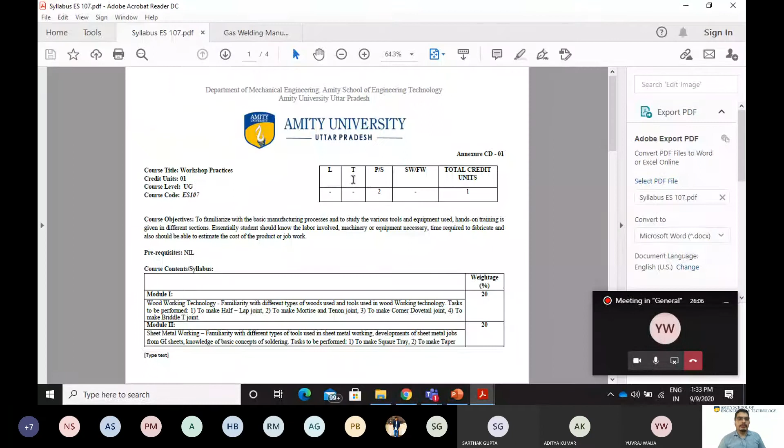Now we are going to start our syllabus. I'm going to discuss with you the first thing about your syllabus. Yes students, are you able to see the screen? Yes sir, yes sir, yes sir. Okay great.

Now listen, beta, this course is basically workshop practices. Firstly, let me give you the theme of today's lecture. First we will discuss our syllabus, then the whole practicals or shops which we are going to do in this course, then after that we will start with welding, gas welding and arc welding. These are the steps which we are going to follow in this course.

The course title for this course is workshop practices. Students, if you have any doubt at any time, just say excuse me sir, and I will try to answer your question. You can ask anytime. If you are facing a small problem, just tell me sir, we are not able to understand, kindly repeat it.

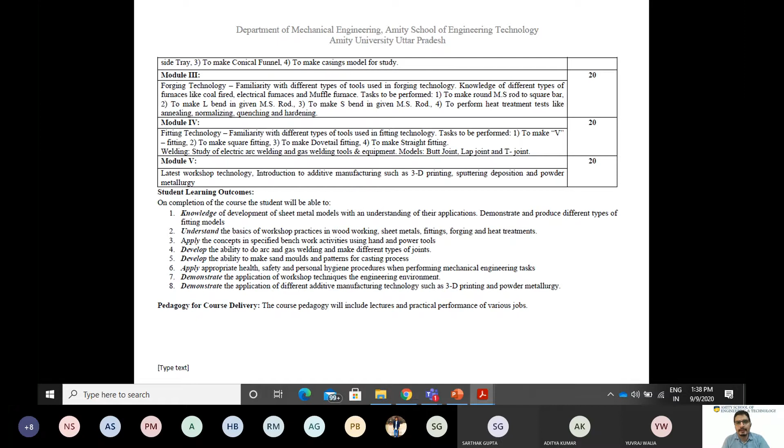These are the SLOs of this course, which are important for you. These are the experiments we need to complete - 11 or 10 experiments we will try to complete this semester. I will explain after 2 or 3 minutes more what these experiments mean and how we are going to do them.

The most important thing for all of you is this assessment - how we will assess you for this course. The internal assessment is 40 marks, and the end-term examination is 60 marks. Out of the 40 marks, 5 marks is for attendance. If you get 75% attendance, then only you are eligible for the final exam, and at that point you get 0 marks.

Out of these 5 attendance marks, if you get 80% attendance, then 1 mark. Accordingly it will increase at 85, 90, 95, and 95 to 100.

This PR is your performance, how you are going to perform the experiment. This is your lab record. What do you mean by lab record? If I'm just taking an example of today only, I will complete one experiment, that is the welding shop, gas welding and arc welding. Today we will try to complete it.

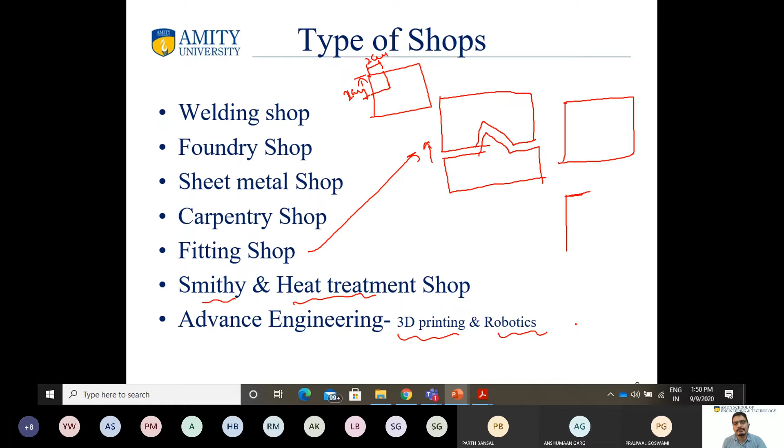Then after that, I will explain what is the smithy and heat treatment shop. And the last one is we will do 3D printing and robotics, how the robot is working. These are mainly the 7 shops which are in our syllabus.

The first one is welding shop, which we are going to do today. The second one is foundry shop. The third one is sheet metal shop. Fourth one is carpentry shop. Fifth one fitting, sixth one smithy and heat treatment, and the last one is for advanced engineering.

Right, beta? Prajwal, roll number 30. Yes, sir. Are you able to understand what we are going to do in this lab, beta? Ji sir, yes sir. Okay, great.

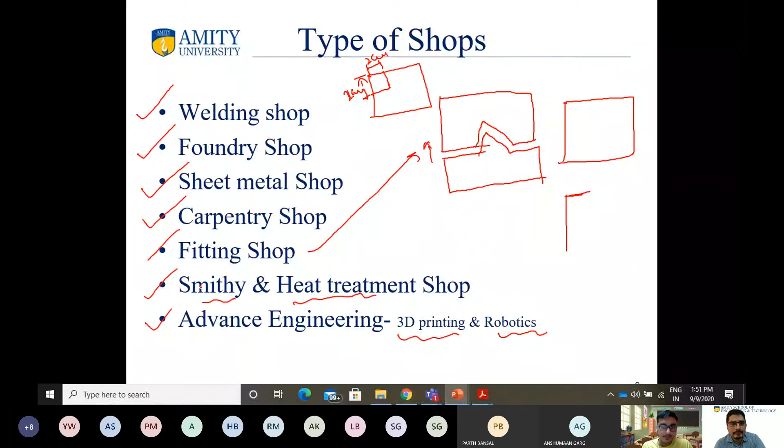Now, I am just giving you a small video about our workshop. You can see here.

This is machine shop. Various lathe machines, milling machines, drilling machines, and cutters are there. In this table, which you are able to see right now, you will do the sheet metal working. Sheet metal shop will be done on this table only.

Just one second, what happened? Are you able to see the video or not? Yes sir, we are able to. Okay, great. Okay, I will wait here.

This table which is in front of you is the carpentry shop. We will do the carpentry work here, and make the wooden joints here on this table. And after that, this is your... just one second.

This is your fitting shop. The fitting shop which I described to you about, we will make the joint, V joint, right? V joint we will make here, and square piece we will cut here. You are able to see the red color device, known as the bench vise, in which you will fix your material. These are the bench vises.

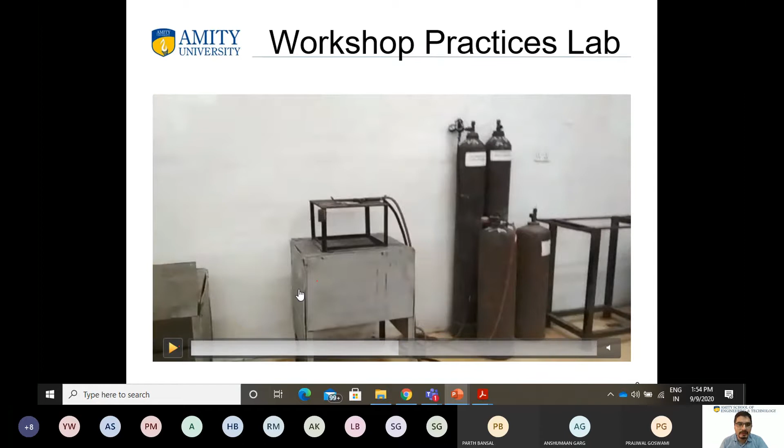I will explain. Basically you have to understand where the area is and how you are going to perform, so that's why I'm showing you this video. This is the gas welding area.

Are you able to see the sand? This is sand. Yes sir. In this sand we will do the casting shop, foundry shop - basically the single piece pattern and double piece pattern we will do in this area.

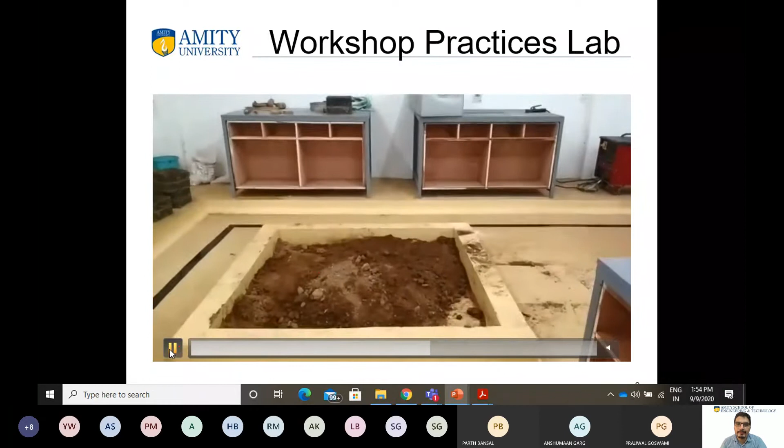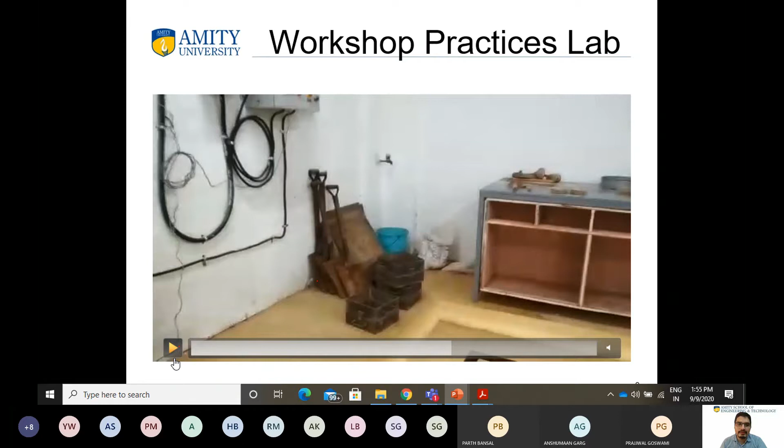Are you able to see the boxes in which my cursor is moving? These are the boxes in which you will make the mold - these are the cope and drag. I will explain you further. These are the tools which you are going to use during the casting process, during the foundry process. These are the patterns - single piece pattern and double piece pattern.

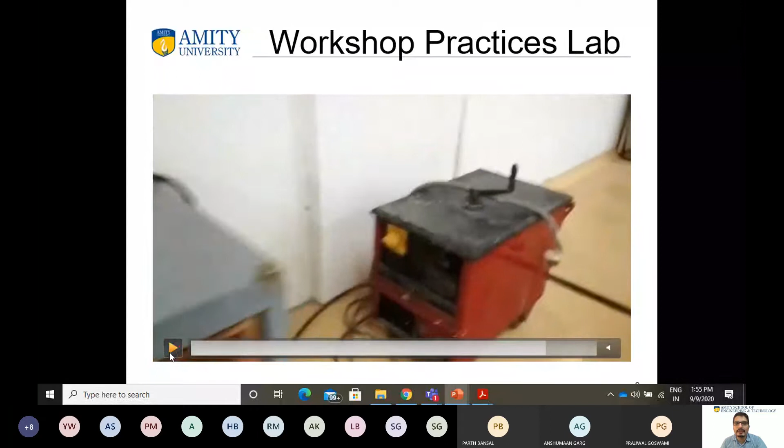Now this area is for the arc welding. This is a transformer. With the help of this you will do the arc welding.

This is a complete workshop of your central workshop, in which we will do the casting shop, gas welding, carpentry, fitting, and sheet metal work. I think now you are able to see where you are going to work, after lockdown. That is the complete picture about your workshop in which we have to do the work.

Now, these are the experiments which we are going to perform during this session. The first experiment is to make a butt, lap and T-joint. I will tell you the difference between these three joints with the help of gas and electric arc welding. Our today's task is to complete the first experiment.

Then after that, the second shop is to make green sand mold using single and double piece patterns. Third is to make a tray, cylinder, hopper and funnel of zinc coated iron sheet. Next is about your carpentry shop, then your fitting shop, then your blacksmithy operations. Next ones are basically study experiments - the last four are the study experiments.

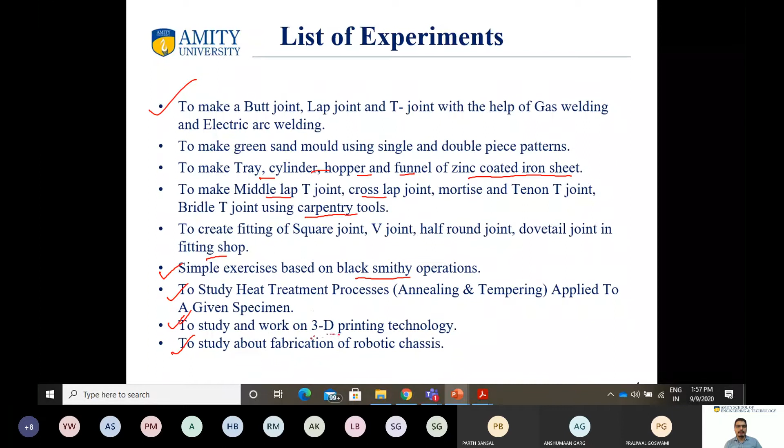And these are the practical experiments which we have to perform. When we meet after lockdown, we will perform these 6 experiments, and these are only the study experiments - to study and work on 3D printing technology, and to study about fabrication of robotics chassis. These are the 9 experiments which we have to perform. Okay students, any doubt?

Any doubt till now? I think now you are able to understand what we are going to do and where, what are the shops, what is the aim of this subject. And one thing that is important, and you have not asked me, the query is basically you have to ask from me like, sir, we are computer science students, why there is a need of all these things? You have to do the work on the computer only, you have to do the programming. Why is there a need of all these things? Why are we studying this course? That question must come from your side. Are you not curious about this question?

Yes, sir, but you have not asked. Then I don't think I need to give the answer of this question. Sir, I was thinking that you're going to explain it in the end. If you didn't, then I would have asked in the end.

Okay beta, when you are going to do computer science engineering, it is not just programming. When you think about programming, you have to think about the basic ideas also. Like I am guiding one student of your IT, BTech IT fourth year, who is doing his major project basically on lift pulley. He is trying to make the lift pulley and do the programming for it, how they can reduce congestion or mishappening in the lift.

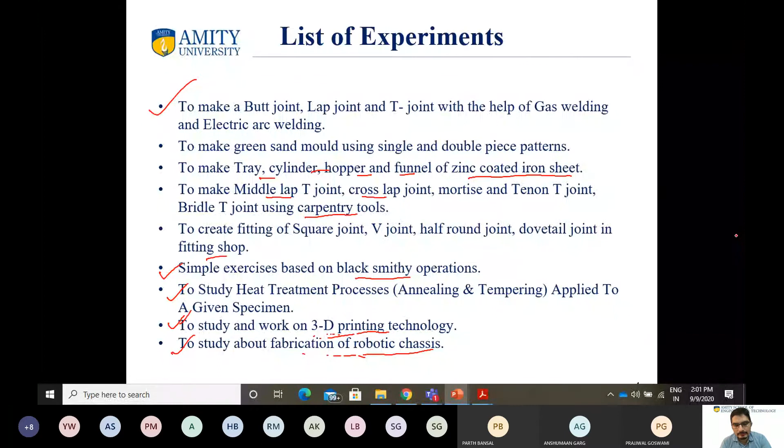Any doubt? Can I proceed for the first experiment now? Yes sir. Shantanu Raj, 331. Yes sir, it is clear beta? Yes sir. Okay, now today we are going to perform the first experiment, which is welding.

In welding, we will try to understand that there are two types of welding: gas welding and electric arc welding. Now here, the first term is welding. You must firstly know the meaning of welding. What do you mean by welding?

Can anyone give me the answer of welding? One by one, when you give the answer, firstly give me your roll number, then after that give the answer. Roll number? 351, Parth. Please tell me beta. So welding means joining two metals so that they are combined into one single piece of whatever the metal is, so that their strength is very strong, they are very difficult to separate. Okay, good try beta.

Any other student who wants to give me the answer of welding? What do you mean by welding? Yes, tell me beta. Sir, my roll number is 20346. Only give me the last digit beta. 346, Rakshit. Yes Rakshit beta. Sir, it is the process of joining by heating a third element in between the two, and as soon as the third metal comes back to normal solid state, by that time those two are already connected with each other. Yes, good try.

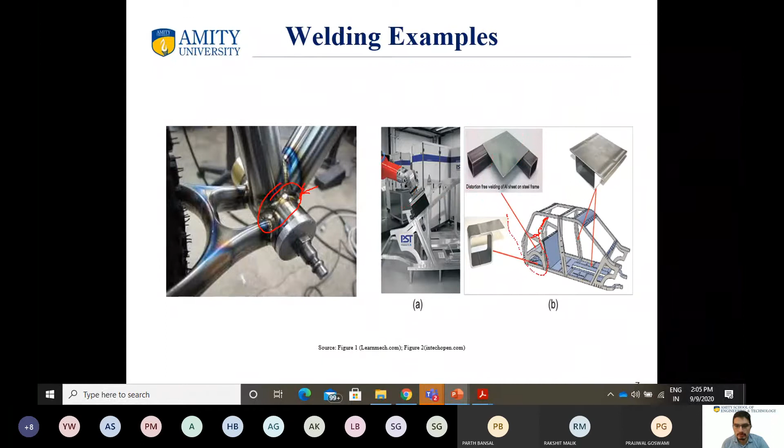Any doubt? Student, any doubt? You are asking anything? You can see here.

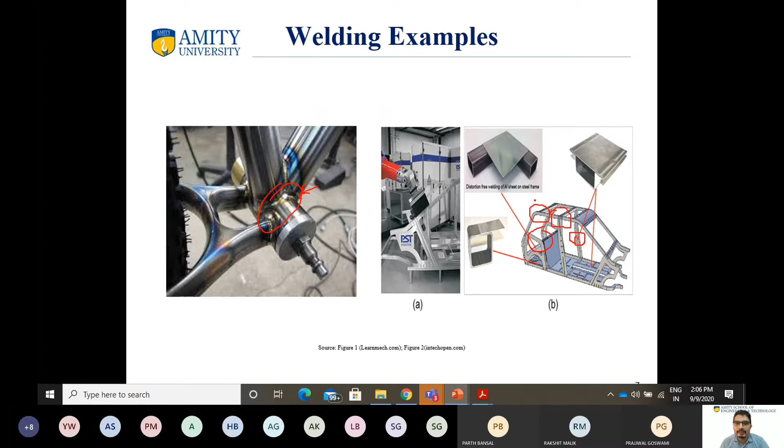Every part of your automobile engineering is joined by welding only. This can be arc welding or this can be gas welding also. I will tell you how it is decided, how we are deciding what type of welding is required.

The first thing we need to understand is, what do you mean by welding? Welding is the process of joining two metal pieces by application of heat, with or without pressure. This is the exact definition of welding: it is the process of joining two metal pieces by application of heat with or without pressure.

Now, the second one is gas welding. Before coming to gas welding, I want to come back. There are two types of welding. Now please try to understand what I want to convey. The first one is what is gas welding and what is arc welding. First, we need to understand what do you mean by welding: when you are going to join two metals with the help of heat, with or without applying pressure.

Now, the heat part, how can you generate it? You can generate heat by two methods in our workshop: with the help of electricity, or with the help of the reaction of gases. When you generate heat with the help of electricity, that is known as arc welding. Simple thing: if you are generating heat with the help of electricity, that type of welding is known as arc welding. If you are generating heat with the help of the reaction of two gases, then that type of welding is known as gas welding.

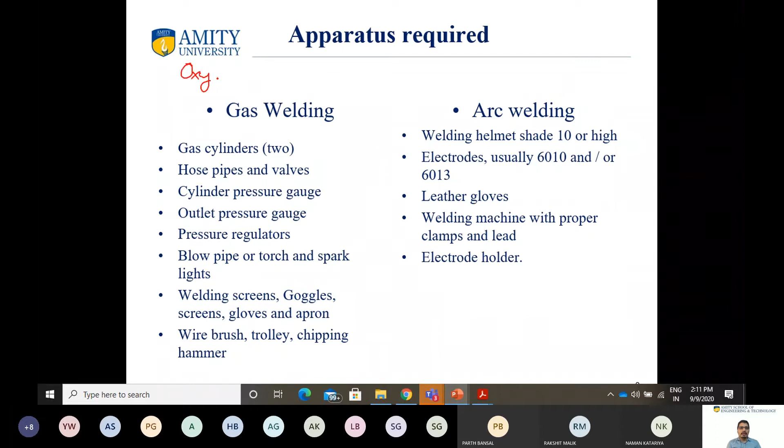Now, when I am talking about oxyacetylene gas welding, what is the formula for oxygen? That is O2. Can anyone tell me the formula for acetylene? C2H2.

When you are reacting these two gases, then what will come? The value coming here will be CO2 plus H2O plus heat. You can balance this reaction by yourself, but the external components will be carbon dioxide plus water plus heat. You are using this heat for doing the gas welding. This heat is in the form of a flame.

Now, this carbon dioxide will go into the air, and this H2O will evaporate with the help of this heat. Okay, students? Any doubt?

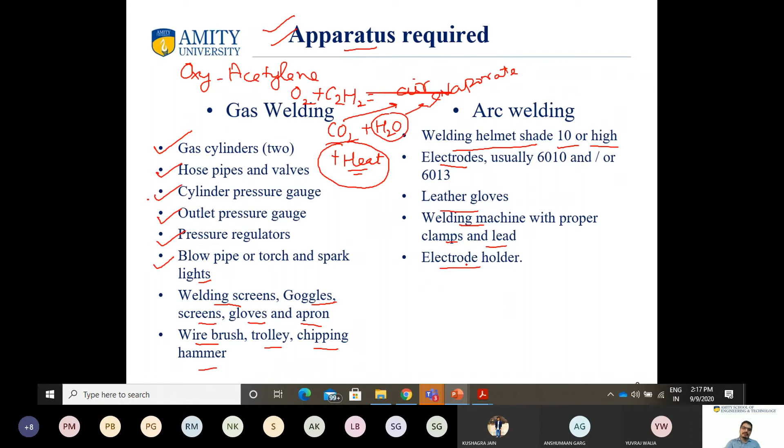In arc welding, we mainly use AC supply and electrodes. In gas welding we use oxygen gas, acetylene, filler metal, rod or wire, or fluxes. This is the answer to the question one student asked me about what we do for gas welding.

In arc welding, we are using electrodes. In gas welding, we are using filler metal, rod or wire, or fluxes. I will explain this further in the next PPTs also.

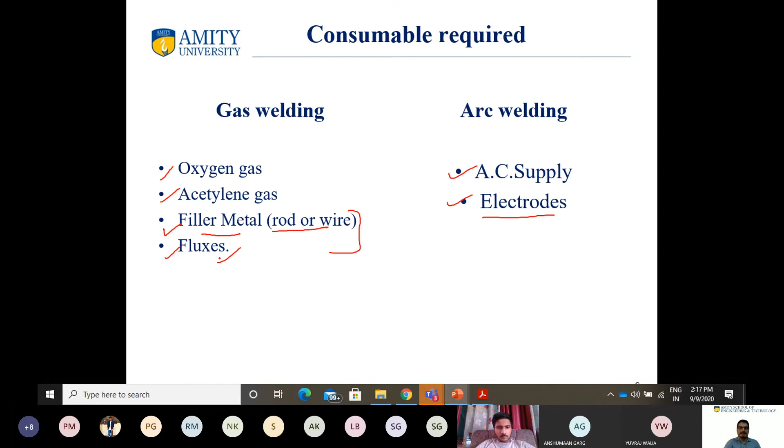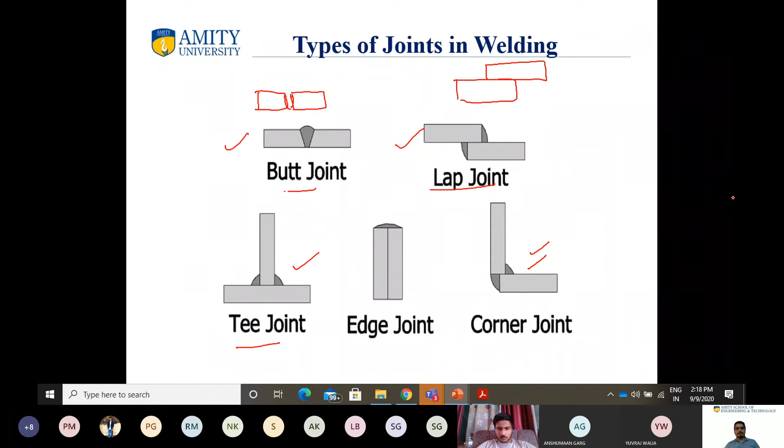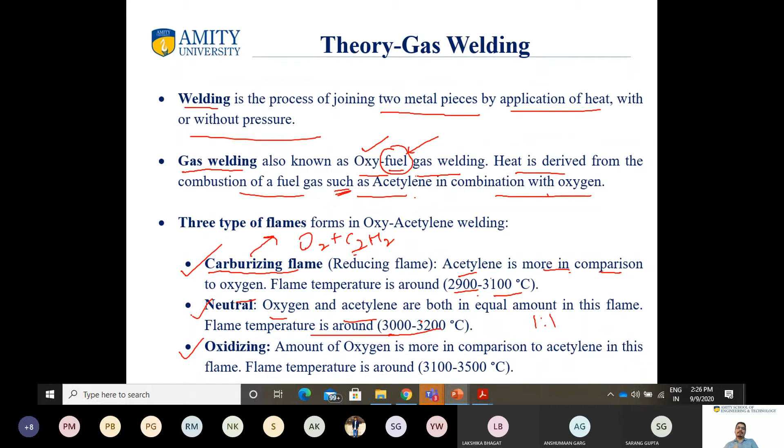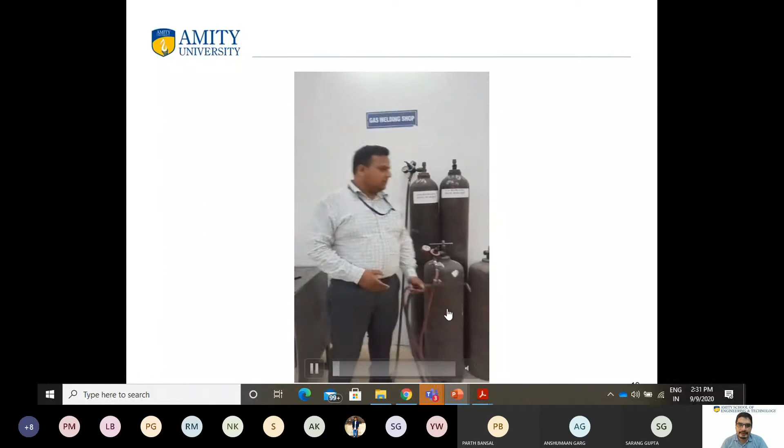Now I am going to show you a video. This is the welding shop. Just see it, if you have any doubt then I will explain again. This one is the oxygen cylinder and acetylene cylinder.

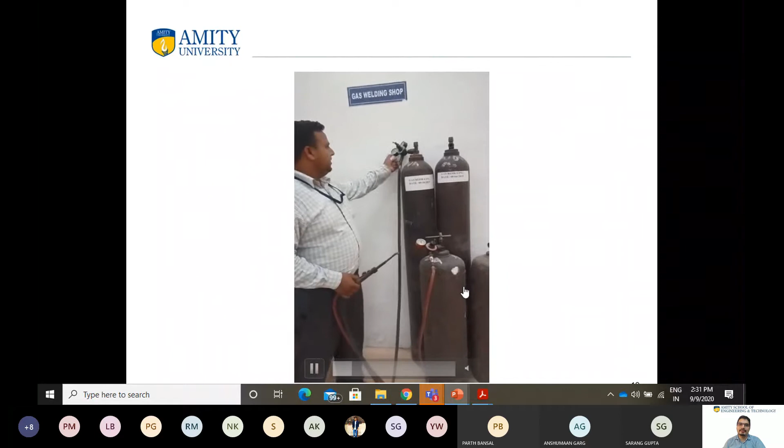From the black hose pipe, your oxygen will come, and from the red hose pipe, your acetylene will come. These are the three gauges. Are you able to see my cursor? Yes sir. In this area, the gases will react.

This is a bed sheet, meaning the bed at which you will do the welding. I will show you the bed again, wait, in the next video.

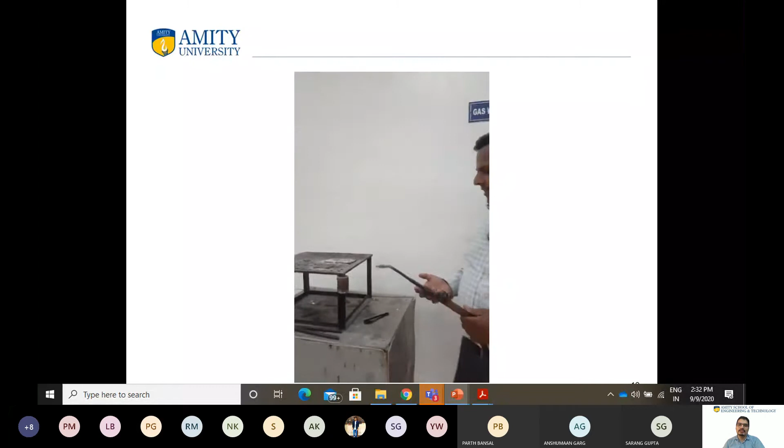He is explaining about the three flames which we have already discussed: oxidizing flame, carburizing flame, and neutral flame. Oxidizing flame can be made when you increase the amount of oxygen, and your carburizing flame you can generate when you increase the amount of acetylene. And if you want to do the neutral flame, you react oxygen and acetylene with the same amount. This is a bed.

This is a filler rod. Are you able to see it in the hand? This one is the filler rod. And in this box, flux is there. You will put the flux on the filler rod.

Why is there a reason for this flux? When you do the welding, the heat will generate, so that heat will not react with the other gases in the atmosphere. This flux helps you make a separate pool, a closed area near your welding, so that in that area other gases will not react. That is the role of the flux.

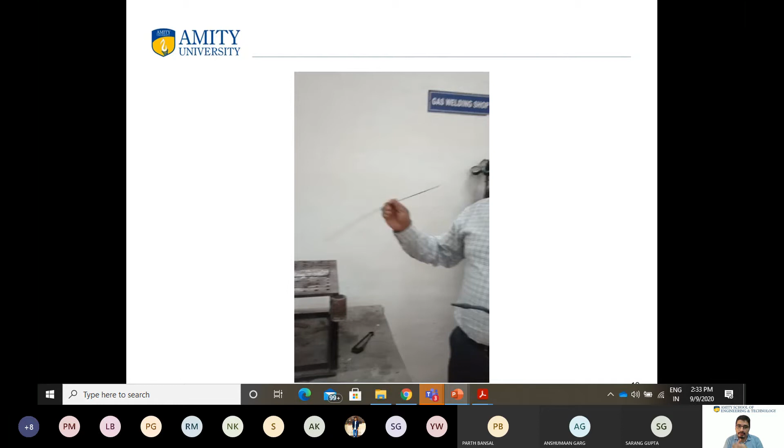The student who asked me the question about this protect weld pool - the protect weld pool comes with the help of the flux only. The role of this flux is to protect your welding from external gases, from the reaction of external gases.

Okay beta? Yes sir. I think we have covered this. This one is the flux. In this box, this is the flux, and this one is the filler rod.

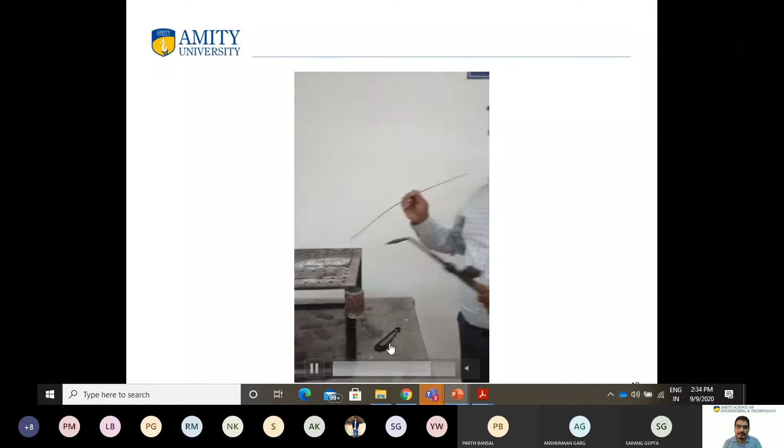Are you able to see the arc? This is the heat. From where does it come? It comes after the reaction of oxygen and acetylene.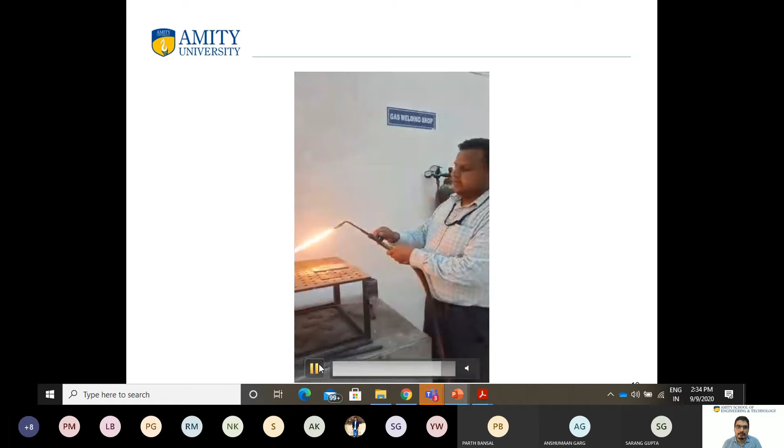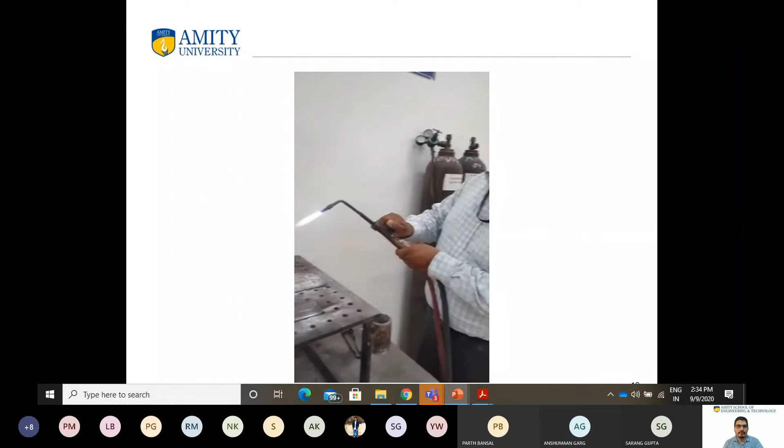As you reduce the amount of oxygen, your flame will go lower. I will show you in the next video also.

Sir, roll number 349, yes Anshuman. Sir, when we change the amount of oxygen and acetylene, the color of the flame also changes. Yes, it will change, shortly it will change.

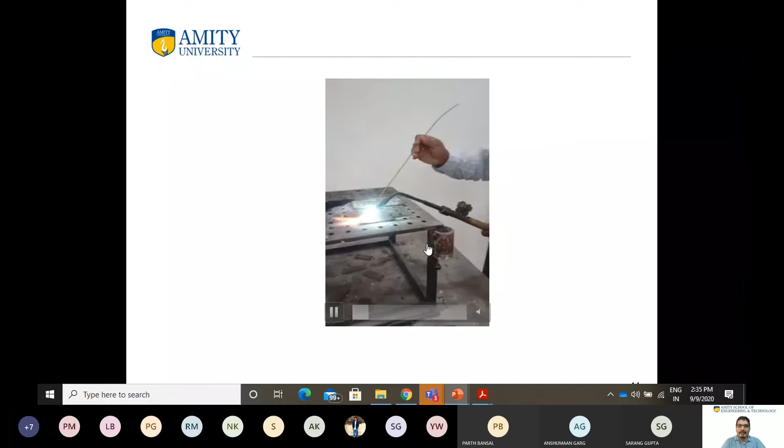Just see here, see the video. When we come back to our university, we will do this experiment again.

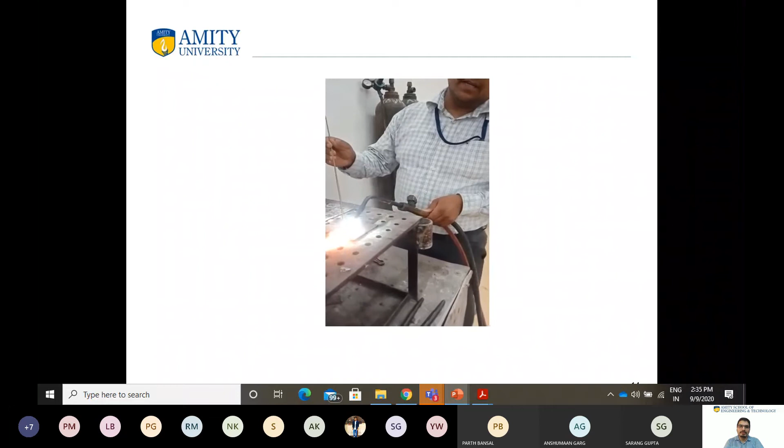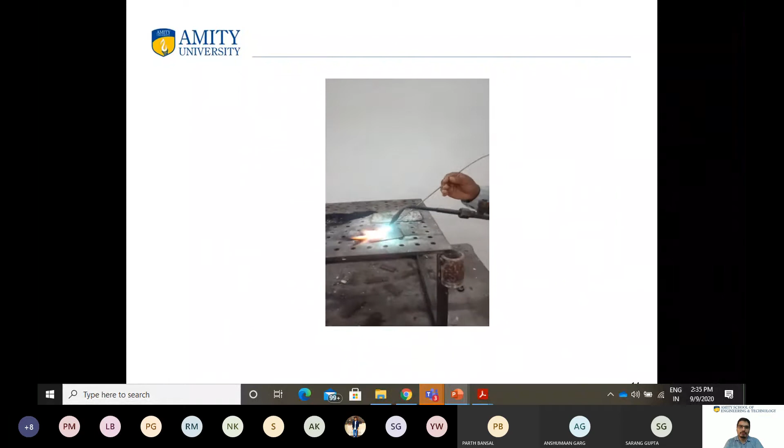This is the flux they are putting, and this is the filler material. Are you able to see, beta? They are making the butt joint, putting the filler material in between the two metals. Flux is also helping to make a...

Tell me, what is the use of flux? It protects the weld, protects it from other gases. Yes.

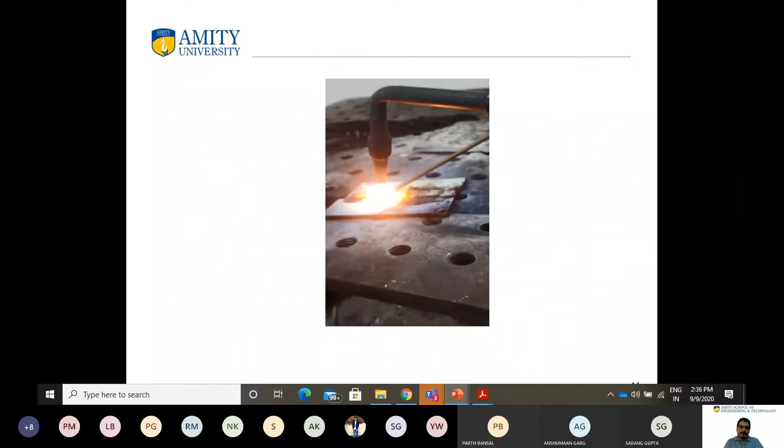Now I think you are able to see this. This is what they have done, they have just joined two metals with the help of gas welding, right? Any doubt? This is your butt joint.

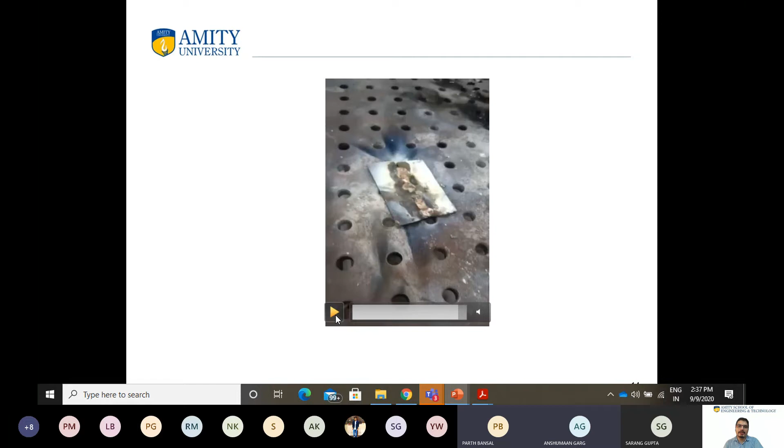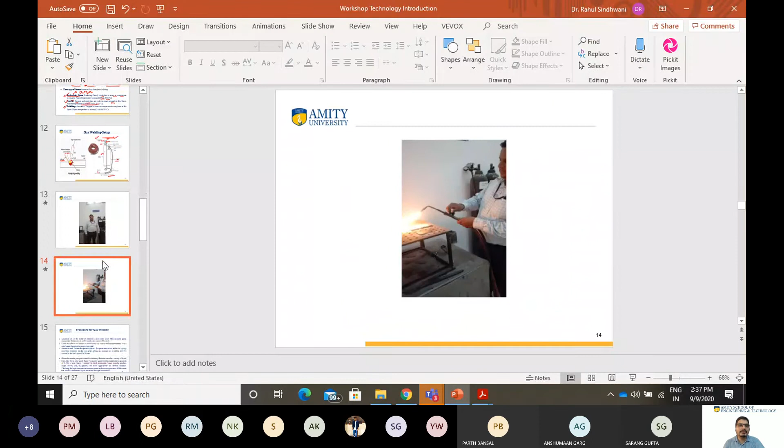Any doubt in the gas welding? No sir, it is clear now.

Yes beta, any student, I think someone. Sir yes. Roll number 326, Lakshita beta, bolo. Sir, I wanted to ask about the pipe that they used, the hose pipes.

Hose pipes? Beta, from where will the gas come? Sir, then two pipes are required, na? One for oxygen and another for acetylene. Obviously, two pipes are there, then beta.

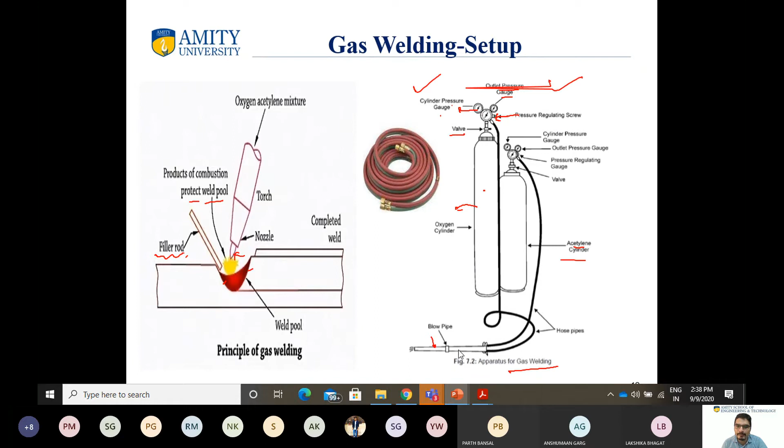Just see here, I have already shown you the two hose pipes. One is for oxygen and one for acetylene, and then they are combinedly joined in the blow pipe. Clear beta? Yes, in this figure also you can see there are two pipes.

This black one is for oxygen and the red one is for acetylene. Also remember this, sometimes the external examiner will ask how you will judge which cylinder has which gas. You have to judge it from the color of the blow pipe hose pipe. If it is black, it is for oxygen, and if it is red, it is for acetylene. Okay Lakshika? Yes sir, got it.

Now this is the procedure for gas welding. I think I have already explained everything, you can read it by yourself now. Can I proceed, can I leave this procedure? We have already discussed everything in detail, right? Now we are going to discuss the electric arc.

Any doubt in the gas welding bit? If you have any doubt, I can stay here, or can I proceed for electric arc welding? It is clear, students? Yes.

Roll number 333. 333, Naman. Yes beta Naman.

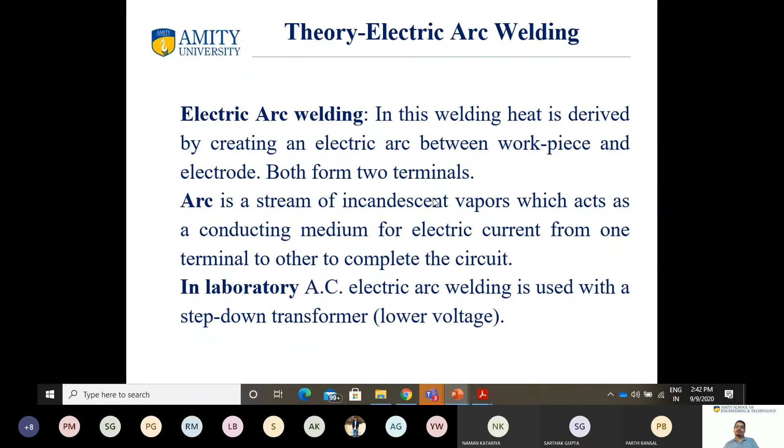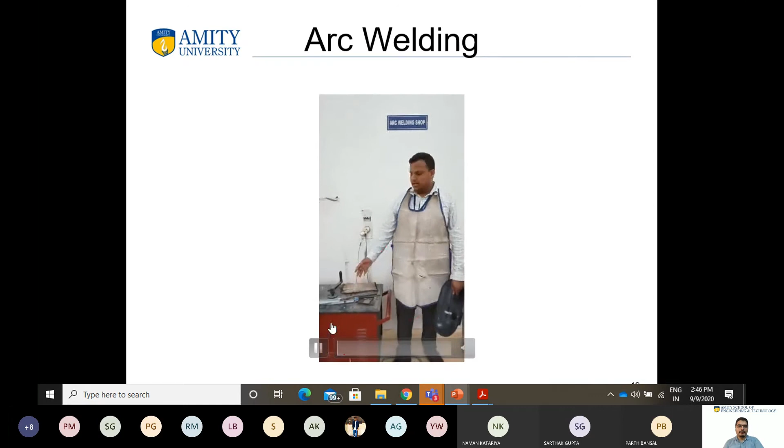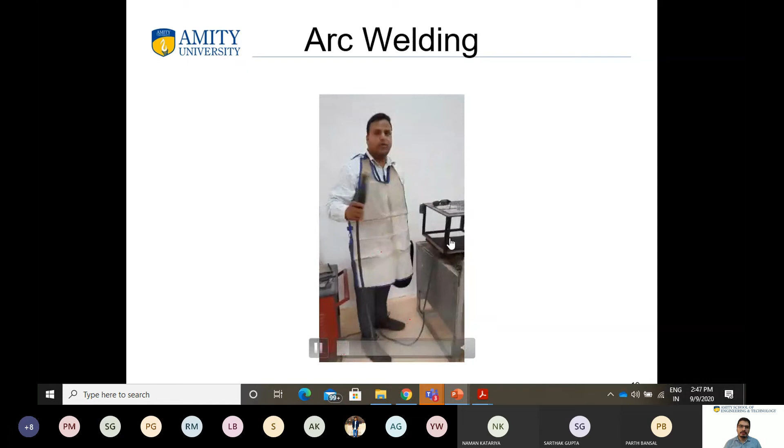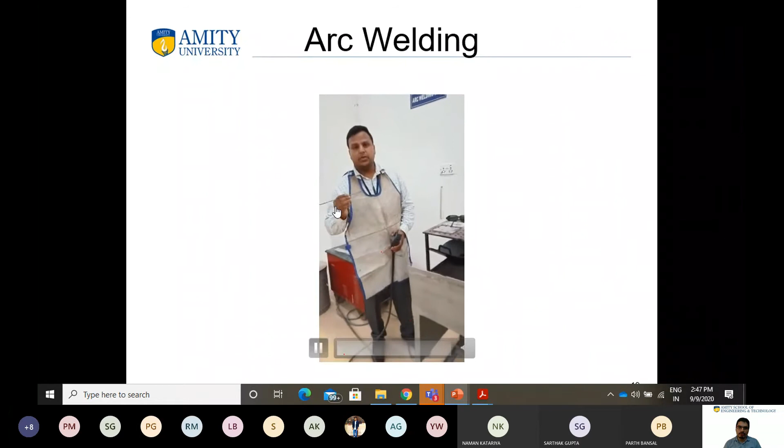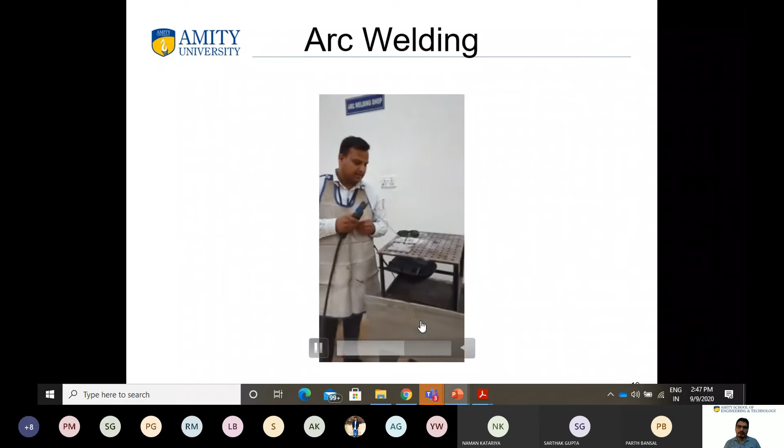They are explaining that this is basically the current supply, which goes to the transformer, then from the transformer it goes to the electrode, and one is given to the work table. On this work table we will do the welding. Always use an apron and gloves when welding. This is the electrode, you put it into the electrode holder, and this electrode has a coating on it. Now see here, when you move this electrode on the material, heat will generate.

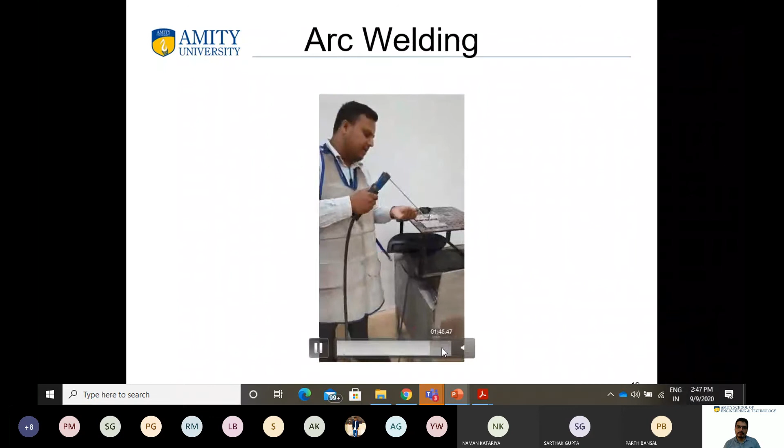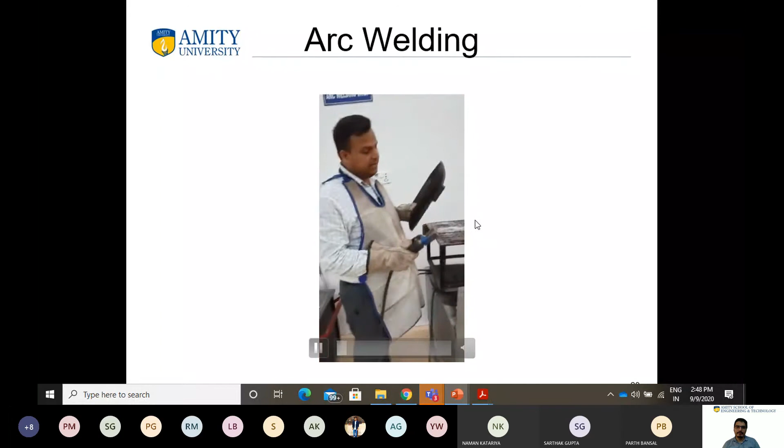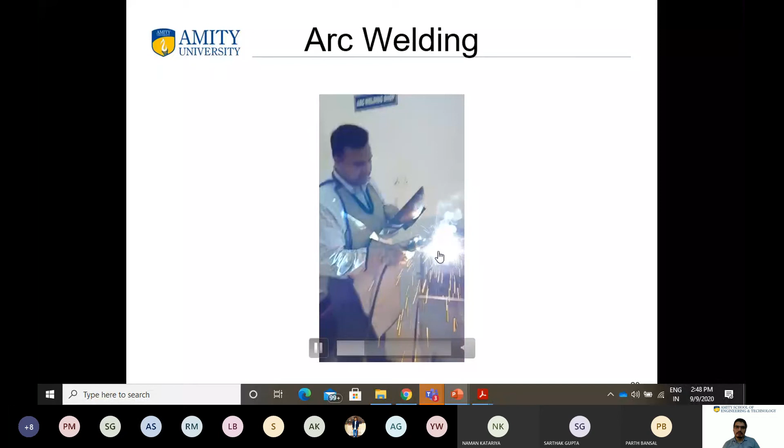With the help of this clamp, you will pick up your welding. You can see here, I have already explained why you are using this glass. You can see how much your arc is producing. If you see it with the naked eye, it will damage your eyes. So always when doing arc welding, you have to use this black glass.

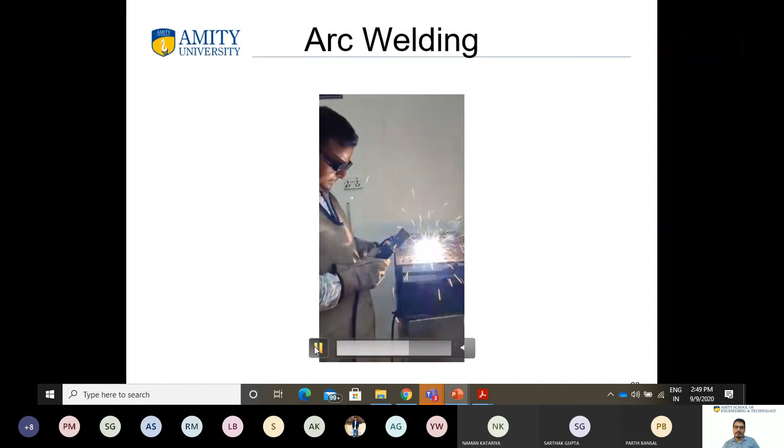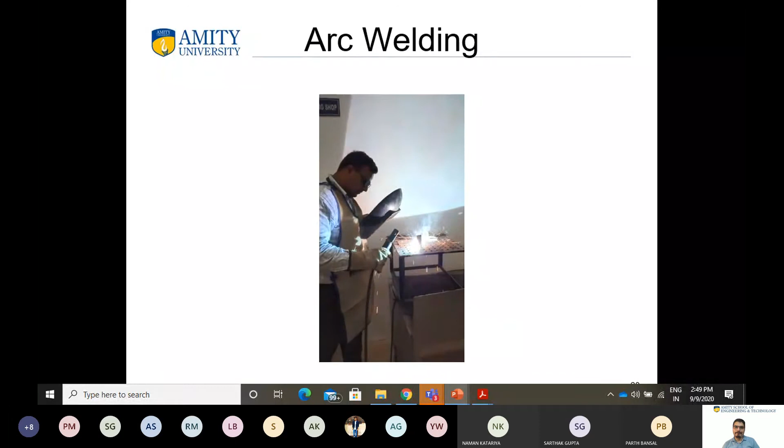They are making the T-joint here. That is the main goal. Now you can see here, tell me student, the name of this joint is Butt joint. And the name of this joint is T joint. And the name of this joint is Edge joint. No, Lap joint. Yes, you are right. Lap joint. So we have lap joint, butt joint, and T joint.

Yeah, this is about your arc welding. I think you are able to understand somewhere about the arc welding and gas welding now. This is all about the procedure for gas and arc welding. You have to read it, I have already explained you. This is the most important thing. Always follow these precautions. When you come into the lab, without these precautions, you can't do your experiment.

Excuse me, sir. Yes, beta. So roll number 349, what is the meaning of this word proper shade

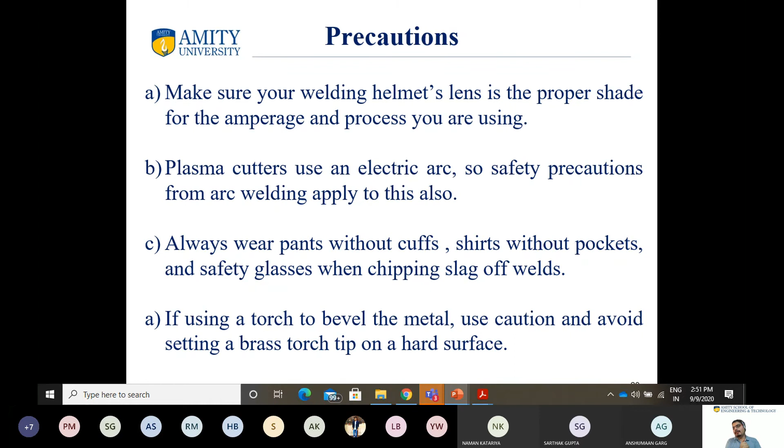for the amperage? Where is it? First point: make sure your welding helmet lens is the proper shade. Proper shade means it should be more than grade 10. The darkness of your glass should be on the higher side, because the heat generated due to arc welding is very high. If you see this electricity with your naked eye, it will damage you. The shade of the glass in the man's hand is very high. They are talking about the shade of this black glass - it must be on the higher side, more than 10, so that when you see through this glass, it will not affect your eye. That's why they say the shade of the glass should be more than 10.

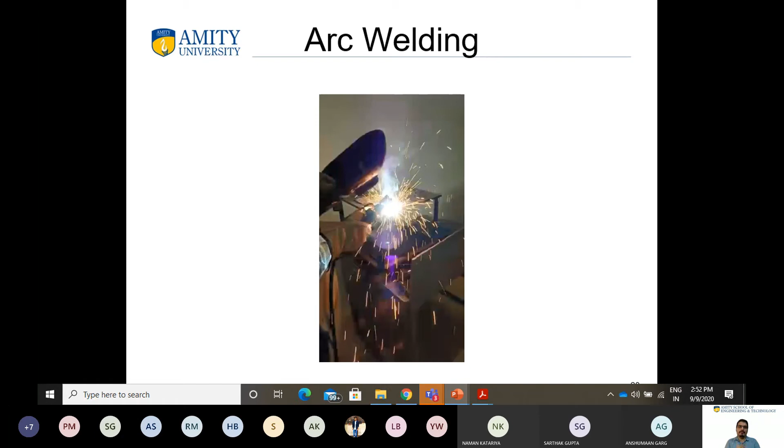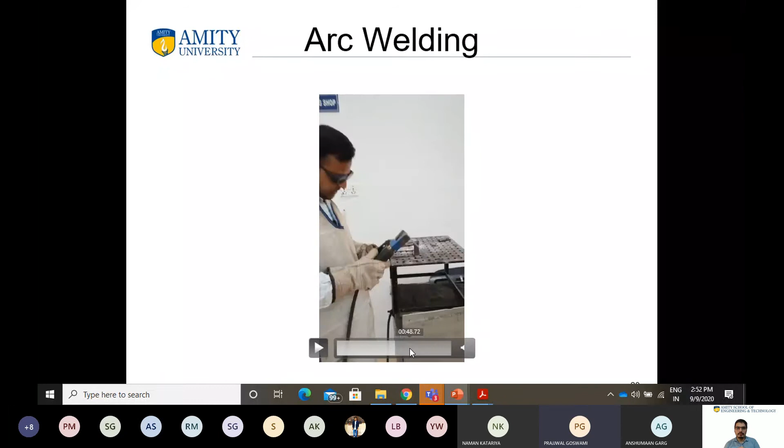Okay, beta. Okay, sir, they are talking about... Sorry sir, my internet disconnected. Okay, no problem, beta.

Yes, beta, roll number 346. Yes sir, in the electric arc joint. Sir, your roll number is? Can you tell me your roll number? 346. 346, Rakshit. Yes, beta.

Sir, in the electric arc joint, what makes the two metals combine? Sir, does the corner surfaces of the two metals melt along with the electrode? Okay, electrode will melt, and when the electrode melts on the joints, it will make a joint. From both sides, your metal will come nearby in the molten stage, and your electrode will also join the pieces.

Electrode, okay sir. These are the precautions: oxygen and acetylene cylinders must be secured and stored in an upright position, and an oxy-acetylene torch can produce a large amount of heat. Beware that any object the flame is directed towards will become hot. Always have a suitable fire extinguisher near your work area. Do not use an oxy-acetylene torch near any flammable material. Make sure you understand and observe all legislative and personal safety procedures when carrying out these tasks. If you are unsure what these are, ask your supervisor.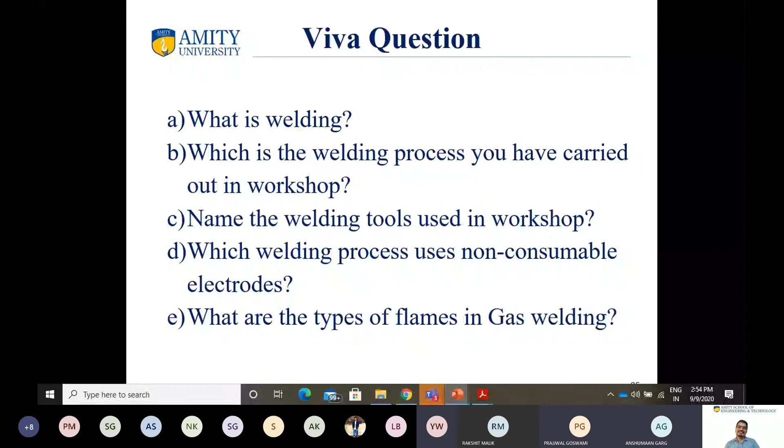Carburizing flame. Carburizing, neutral, and oxidizing. Oxidizing. Yes. Right. Good.

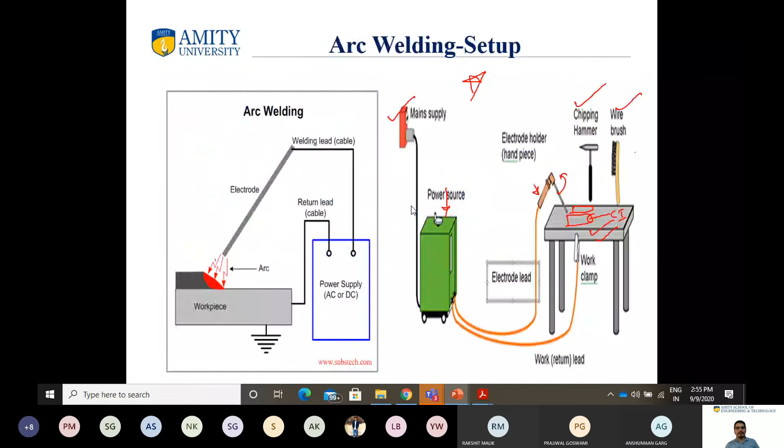Now, that is all about today's experiment. You can refer to the workshop lab manual for more details. I think I've already covered everything about gas welding today. If you still have any doubt, we can discuss it in the next class also.

Sir, please brief about how to record the practical in the file. Yes, I'm coming to that point only, beta. This file I have already uploaded for you. In the file option, this file which I am going to show you, this is in your file option.

But one thing that is most important, please don't copy directly from this file. I know each and every word which is written in this file. You have to write by yourself what you have understood today, what you have learned in these 2 hours. You can take the photograph from here, but don't copy the wording.

Like, the objective must be the same. The first thing you have to write in the experiment is the objective, must be written with the black pen. Then after that you have to write with the blue pen: to make a butt joint, lap joint and T-joint with the help of gas welding and electric arc welding.

Why am I giving you this to write? When all these things are on the internet, and I am giving you the online version also, then why am I saying to write it? So that you understand, you are able to understand this concept completely. So you have to write it in your own language.

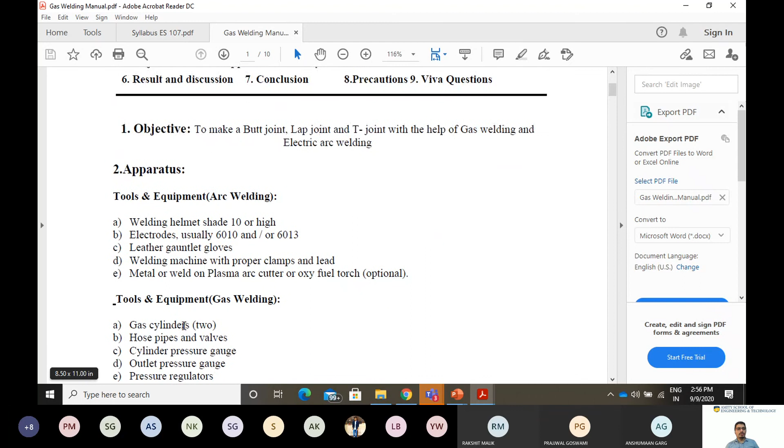Please don't copy directly from here. The first one, you have to write the objective. The second one, you have to write here the apparatus which we have used, the tools and equipment, consumables. All these will come under the apparatus only.

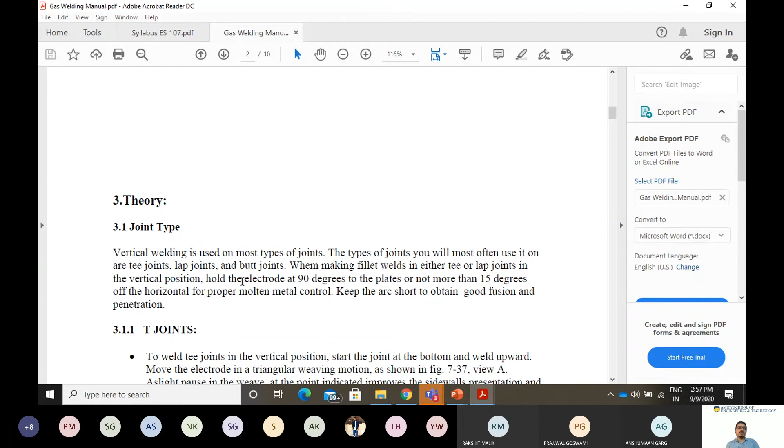This is the theory. In the theory point you have to just write what type of joint is possible and what you mean by it. There is no need to write so much, one page for one joint. You can write in 2 or 3 lines, that is sufficient, but those lines should be yours only. Don't copy from anywhere. Like T-joint, butt joint and lap joint, what you are able to understand, you have to write here. Make a figure.

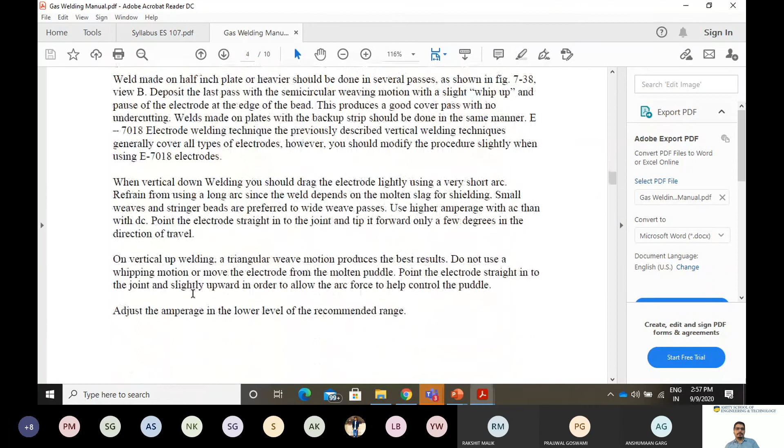Then after that, they have explained the gas welding, oxyacetylene welding reaction. I have already explained C2H2 plus O2 gives CO2 plus H2O plus heat. Then they have just balanced it. Types of flame: carburizing flame, oxidizing flame, neutral flame.

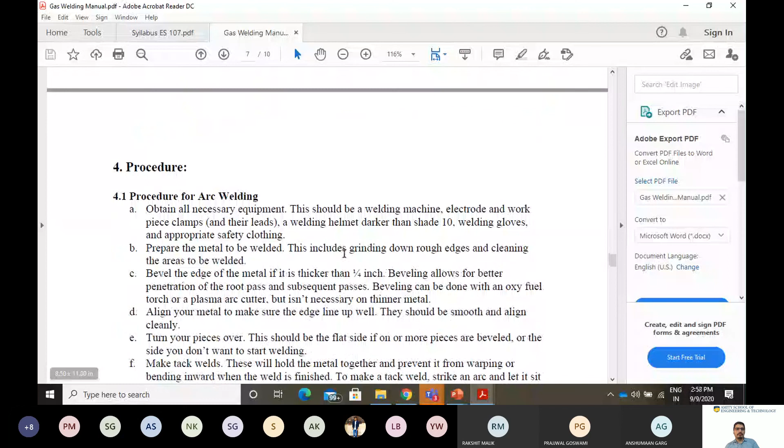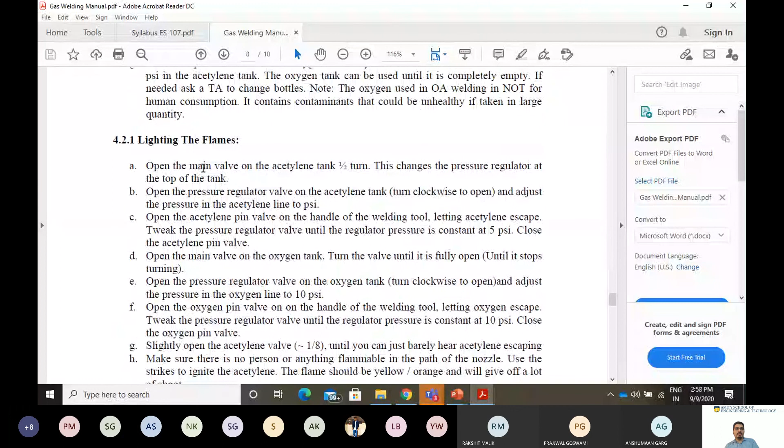Procedure for arc welding, all these things are in your PPT also. Procedure for gas welding, lighting the flame, backfiring, shutting down and cleaning up, observation, result and discussion, conclusion and precautions, viva questions.

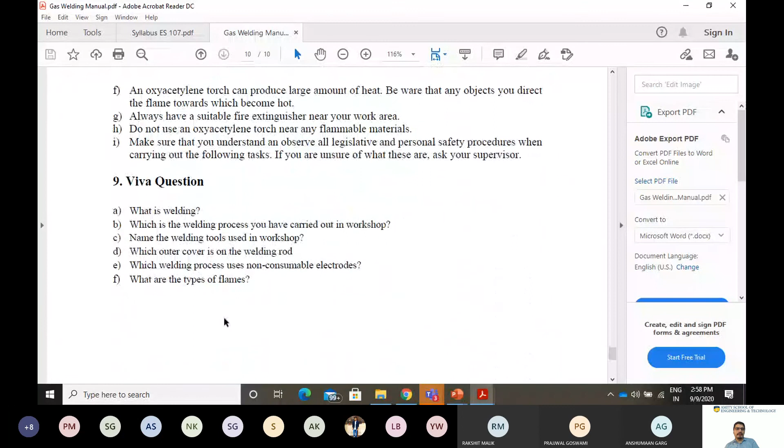Any doubt, beta? Now, what you have to write, just see here. Firstly, you will write the objective, then the apparatus, then the theory, then the procedure, observation, result and discussion, conclusion, precaution. There is no need to write the viva questions. Except viva questions, you have to write all. You have to make these 8 headings.

In your notebook, write it in your own language, in your own words, what you have understood from these 2 hours. Okay, students? Yes sir. And we have to submit this.

Next lab, like today is Wednesday, on the next Wednesday I will check your file one by one. I will check your file and I will ask the question.

Excuse me sir, in this PDF there are topics like lighting the flame, backfiring. Do we also have to write those in the file? That is for your knowledge only, you have to read it. There is no need to write it. Whatever I have explained, that is more than sufficient. You have to write that thing only.

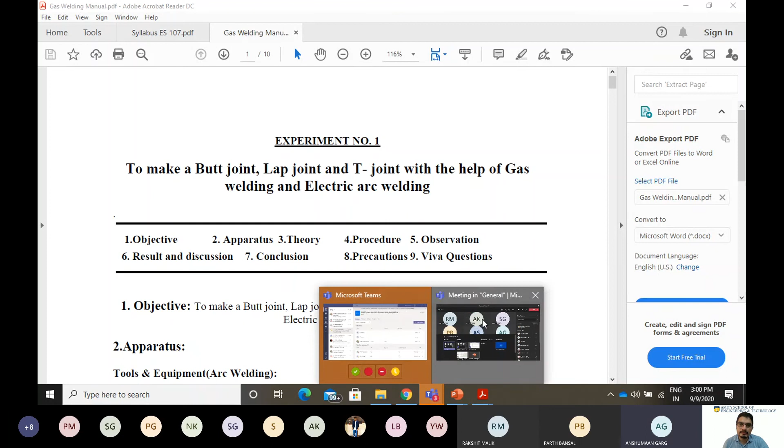Here it is, ES107. Here on the file option, the two files are there - that is the syllabus and your gas welding manual. Now I am going to upload your video of this class, today's class, and the PPT also.

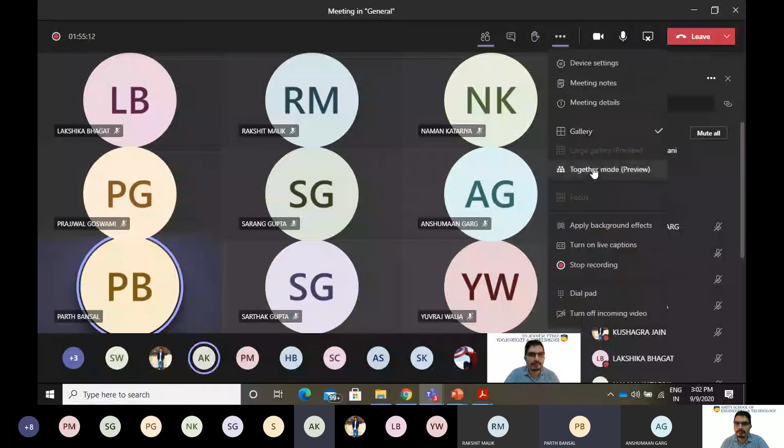Any other doubt? Now I am going to take the attendance. Roll number 326, Lakshika. All of you please open your camera now, because during the attendance it is compulsory for all of you to open the camera. Present, sir. Open your camera, beta, Lakshika.

Sir, sorry, I am finding some problem. Lakshika, please from the next time resolve all these issues in your camera or mic. Please resolve, okay? Yes sir, sorry. No problem. Roll number 328, Sagar. When I am asking the roll number, you have to raise your hand, then I will see and give you the attendance. Roll number 328, Sagar.

Sagar, are you there, beta? Okay, your voice is not coming, I think your mic is not working. Other students, are you able to listen to him? No sir, no sir. Sir, is it audible now? My internet was not working. Yes, now it's audible, yes.

Okay, Sagar. Aditya? Present. Raise your hand. Yes. Prajwal, roll number 330. Present, sir. Yes, 331, Shantanu Raj. Present, sir. Yes, Ojas, 332. Naman, 333. Present, sir.